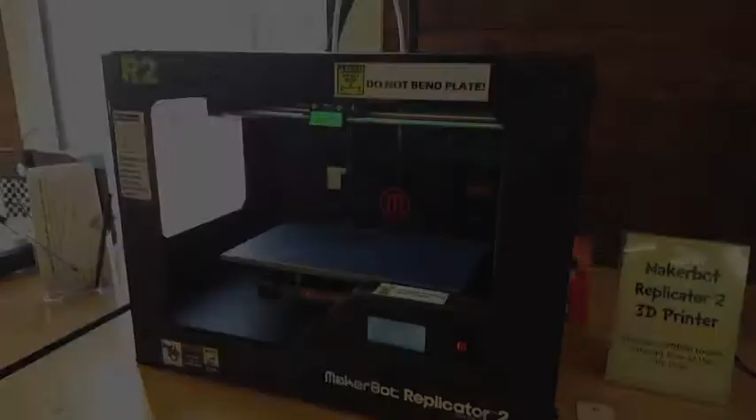This training video will cover the MakerBot Replicator 2 3D printer, and upon completion of the video, you'll want to take our online quiz so that you can become certified.

The 3D printer here runs off of PLA plastic, and it comes in the form of a spool that's just found on the back. This spool only has about a quarter of the way left, a little less actually. So there's not much left, but a normal roll will have 1,000 grams or 1 kilogram of material.

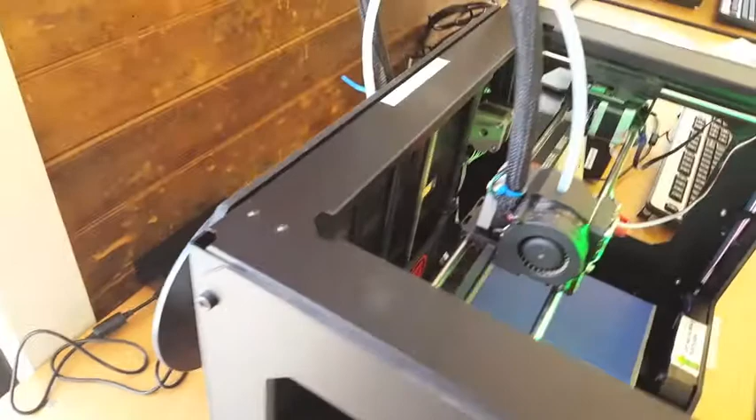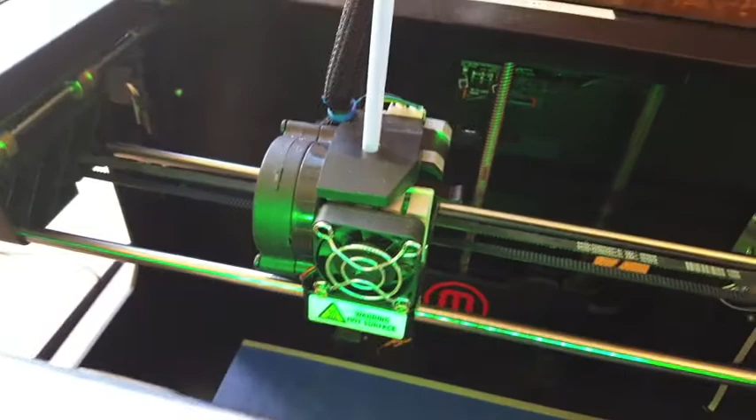As we move up here, there's going to be a guide tube, that clear guide tube there, which helps to guide the PLA plastic into what's called the extruder. And the extruder is pretty much just a hot glue gun on tracks, really, on an X and Y axis track. The plastic is going to come down into that extruder, and it's going to be fed in through a stepper motor and then heated so that it can come out that nozzle right there. Now this is an important part.

Don't touch this nozzle. It's around 230 degrees Celsius and it's about 450-460 degrees Fahrenheit. So it's very, very hot, so do not touch that surface.

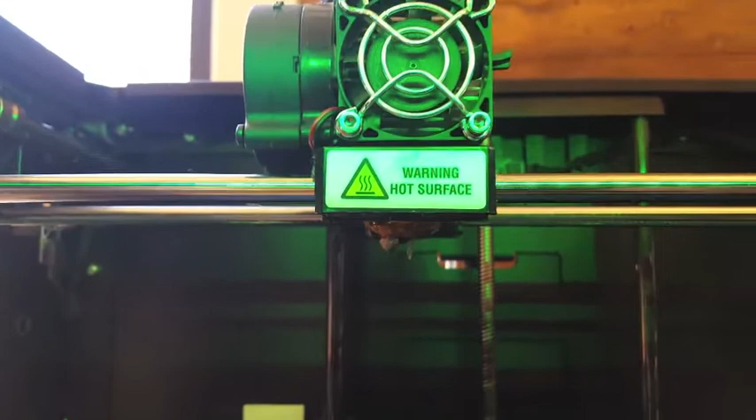Now where does the plastic go? Well, the plastic's going to go onto what's called a build plate. This is the build plate here. And here in the Fab Lab we have a couple different types of build plates. This one here is a metal machined build plate, and we do have some that are acrylic.

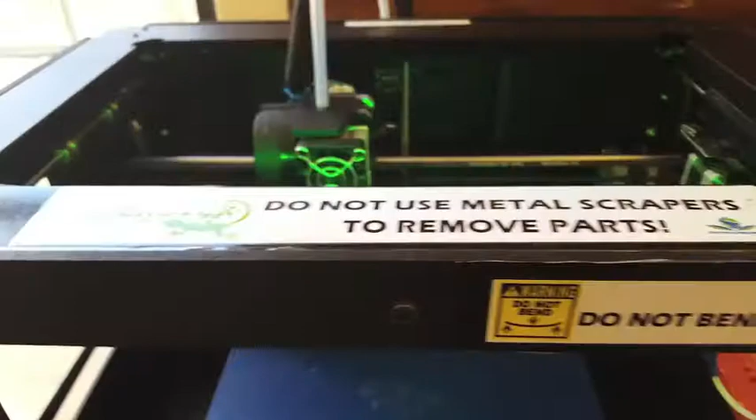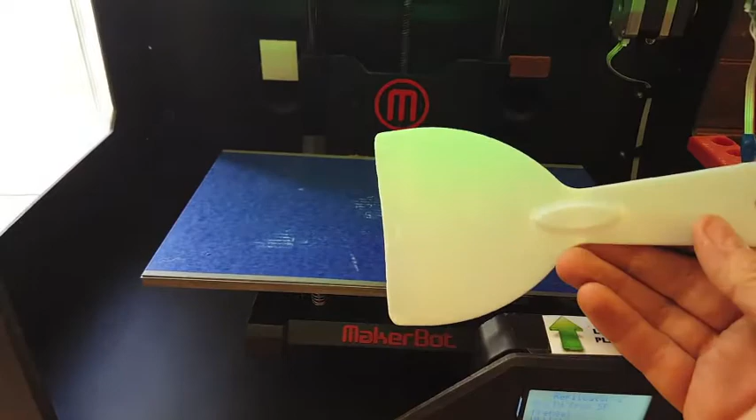One thing to note when you're using this build plate here, you'll want to make sure that you don't use any metal scrapers on removing the parts from these machines, and they have the markings listed on the machines. Instead, you'll want to either use a plastic scraper, or you'll actually just be able to twist the plate and it'll release your print. And I'll show you that in a little bit.

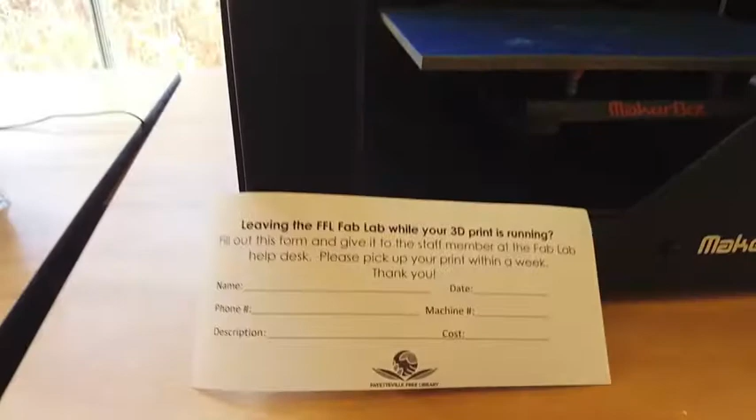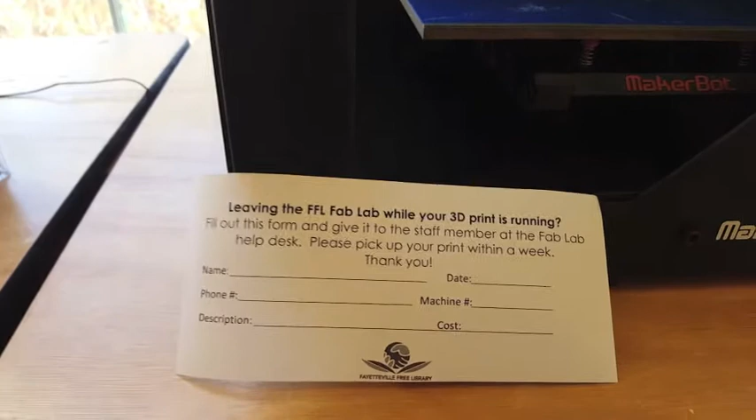One of the other things you'll note is that the machine has a letter and number corresponding to it, and this is to help with identifying parts that are printed from the machine and then tagged. Now tagging is actually a form that you'll fill out if you are leaving the Fab Lab while your 3D print is running. So you don't have to stick around for the entire print, but we do ask that you stick around for at least the first 5 to 10 minutes to watch that first layer go down on your print. And we'll talk about that a little bit more.

But on this form, you'll just fill out a name, phone number, description, the date, and the machine number. So in this case, we would be using R2, and we would place that just right there next to the machine number. Don't worry about the cost. We'll factor that out after. Now, cost does work out to be 5 cents per gram of plastic, and we measure that after the print has been completed, including any support or raft material. We'll talk about the rafts and supports in a little bit.

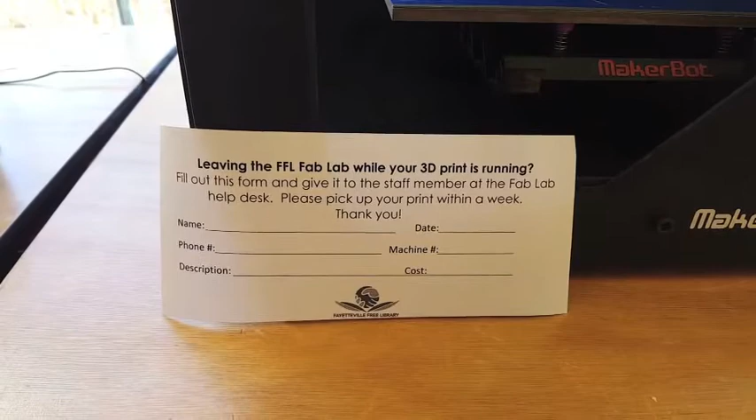So once you've filled out that form, you'll want to pass it along to one of the staff members at the Fab Lab, at the help desk, usually just behind you here. Now this form can be found usually next to one of the Replicator machines, and you'll see them across our Fab Lab. In the Fab Lab we do have 7 of these machines, and there's usually a 3D printer form with every cluster of them.

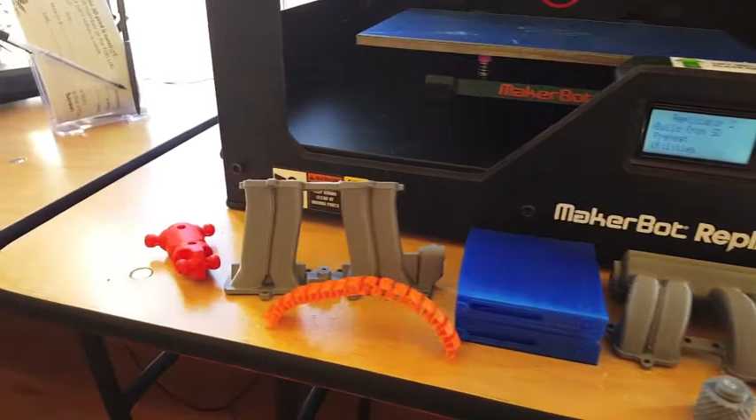So let's just take a look at some of the possibilities that this printer can perform. Now when you're looking at these parts, one thing to take note of is that everything is being built in layers. So we take a look at this, it's called a manifold. We take a look at this file here, and it printed in that orientation like this. And as you can see, there are these layers, these gaps, and this has actually been done on one of the lowest settings that this printer will do.

Lowest setting meaning resolution. So the clarity or the grain on this is fairly coarse, and you can achieve much better, finer prints, and we'll show you how when you're in the MakerBot software. But it's going to be starting from the bottom, and that nozzle is going to be moving side to side, and it's just going to be laying down plastic at the bottom layer. And every layer that it finishes, the build plate will move down and eventually create your 3D file.

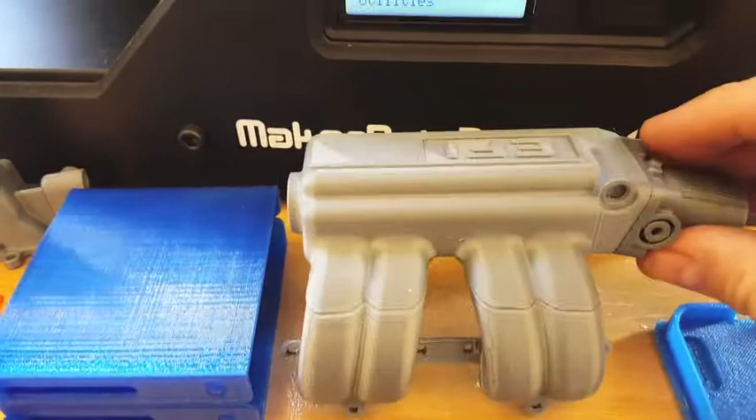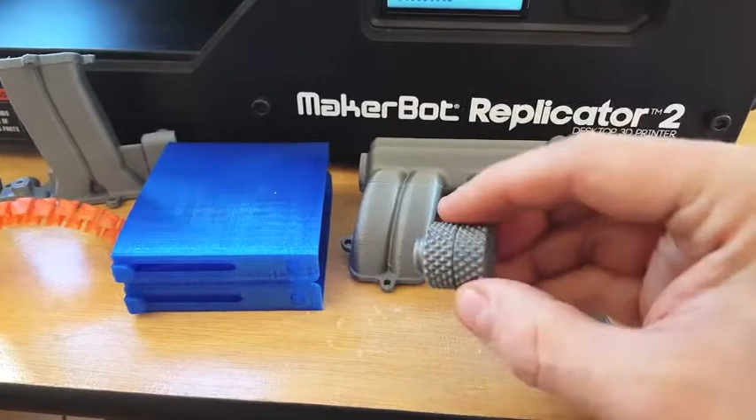So some files are static, they don't move. Some can be flexible, like this. Some actually have ball joints so they can articulate. Some will actually have hinges printed. So this was actually printing just like that. You can of course assemble pieces, whether through glue or nut and bolt. Pieces will also work with each other, like this nut and bolt. Actually, they'll thread onto each other.

And then sometimes parts will actually come with a raft material. So the raft material is like this disc of plastic that's kind of supporting or holding on to this iPhone case. And this disc of plastic, this raft, is disposable, but it helps to keep parts flat. So it's going to help prevent warping. And warping is usually a problem. We prefer that a raft is used.

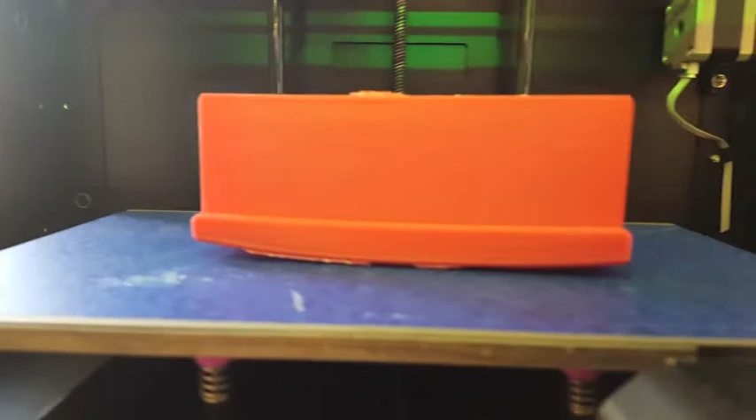And this model here is a pretty old model. This one here, we could see quite a bit of warping. And this warping was due to the fact that a raft was not used, and this wouldn't be desirable for your print. However, this is a successful print; it didn't fail. But a lot of times, when you get that type of warping, you're actually going to see the print fail.

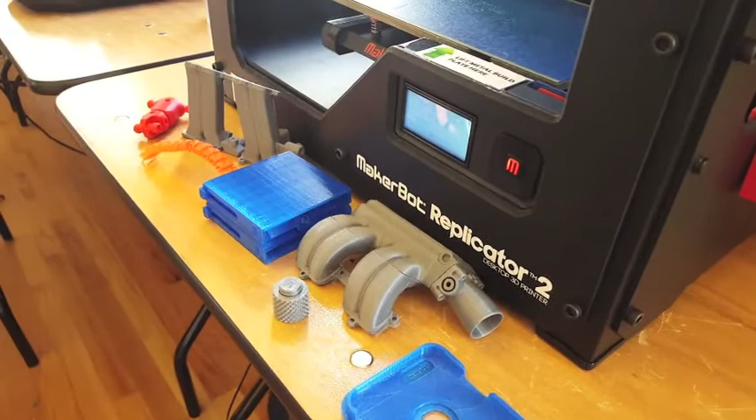So let's talk about how to actually obtain a file for 3D printing. There are two different file types that we'll want to obtain for printing. You can look for either an STL, that's .stl file format, and it's stereolithography, and that one is probably our preferred file format. You can actually find .obj files as well, and those will work with the software. These file types can either be created, downloaded, or scanned.

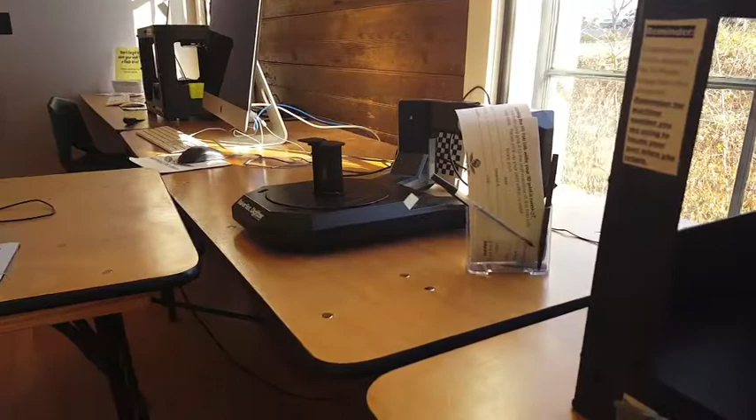When we look at the computer here, we'll see that our desktop is arranged in these 5 different areas. And we really want to take a look at the 3D design apps, 3D printer app, and the help utilities. Now, if you want to scan something, we do have what's called a MakerBot Digitizer. That is available. And that software will be found under this link here. And it's pretty self-explanatory. However, there are some better alternatives for 3D scanning. Another alternative is an app called 123D Catch, which you can use through the web, through Apple devices, or through Android.

In these 3D design apps, we have Tinkercad, FreeCAD, SketchUp, Blender, and an industry standard one, SolidWorks, which is a lot like AutoCAD. So this is more of a professional level, but Tinkercad would probably be the base one, the one that you would want to start off with. It's a browser-based program; you don't have to download anything. You just go to tinkercad.com, you log in, and you can create there, and your files are saved. Come here to the Fab Lab, log in, and your Tinkercad account will have all the files that you've made. You could just download and print from here.

So the other way to obtain one of these STL files is to download them. And one resource that most patrons use is a website called Thingiverse. You want to check that out. Thingiverse is a collection of STL and OBJ files for 3D printing that have been uploaded and created by users from all over. So anybody can upload files, and that means it may be an engineer, a hobbyist, or a young child that has very little experience in 3D design. So your file may or may not work.

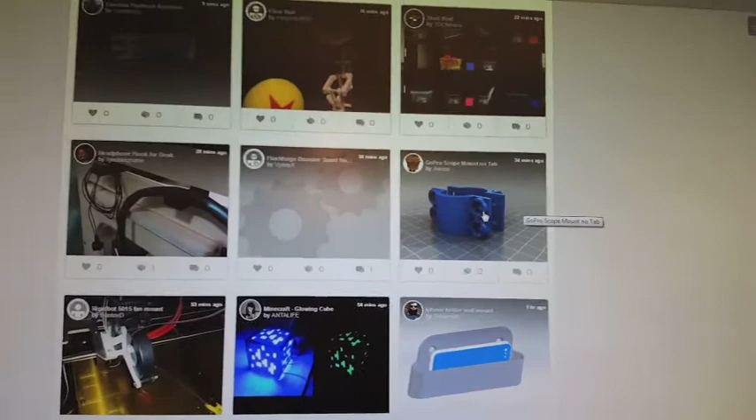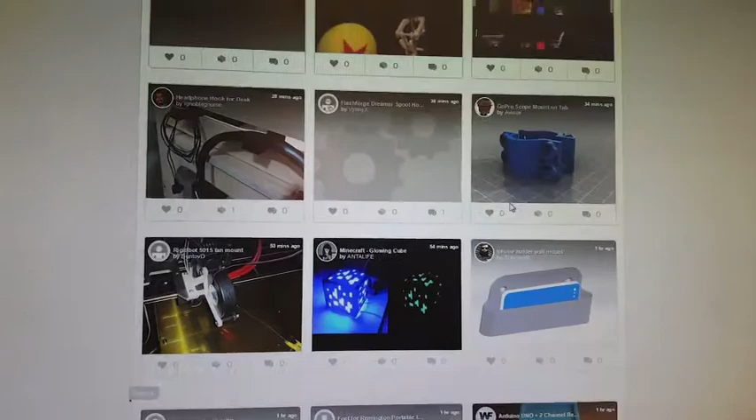Let's just take a look here and click on the Explore button. Click on Things. When we're looking at files here, just be aware of files that are in this computer graphic kind of representation. It's not that they can't be printed, but you'll really want to look for files that have true pictures uploaded to them. These are all kind of like Facebook pages. And looking at one like this, it just means that the user has not uploaded a picture of that object being printed. So it may or may not work.

Once you go onto a file here, you can take a look at it, click Download This Thing, and you'll have your STL. When you usually download files from Thingiverse, they're going to go into the Downloads folder. What you can do is just open up MakerBot Desktop.

And here we'll see a screen of a visual representation of our build platform, the limits of our machine, which are about 6 inches high, about 11 inches wide, and about 6 inches front and back. So it's a fairly big area. There's the front of the machine with this little pointer.

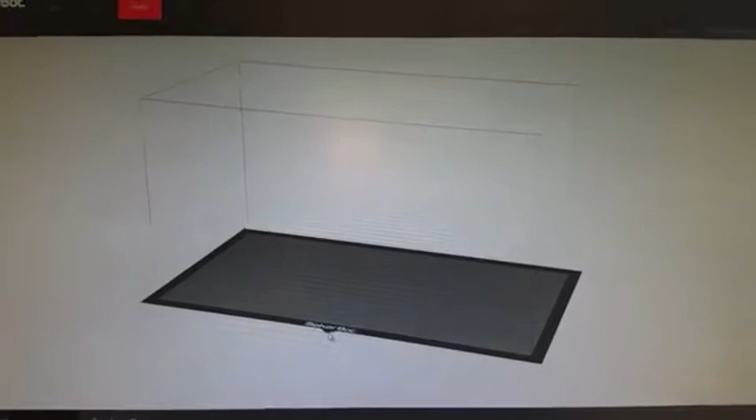Let's add our file that we had either downloaded, created, or scanned. And to do that, we're going to take a look along this grayish bar where it says Untitled, and we'll follow that along. You can see here that it says Settings, Add File, Preview, Export, and Print. Let's click on Add File.

So this is where you would want to navigate to the Downloads folder. And this is most likely where that file will be that you've downloaded from Thingiverse. We're going to pick one that's on the web or on our desktop here for our practice. Here's our file.

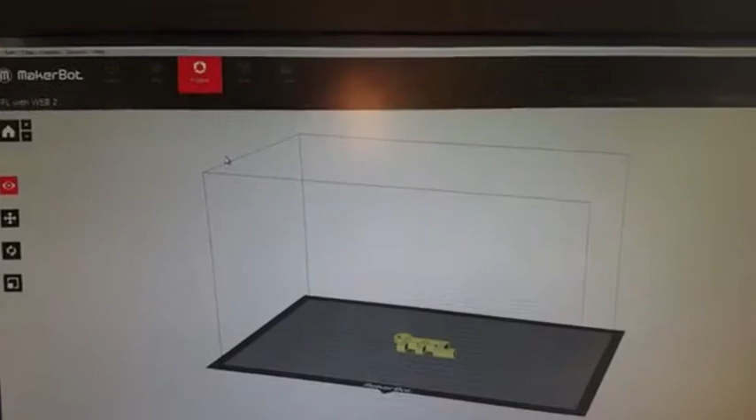And now using the mouse, think of it with 3 different tools. You have your right mouse button, your scroll wheel, and then your left mouse button. Now your right mouse button is always going to be the rotate tool. So you press it down, hold it, and move your mouse, and you'll start to move around in 3D. Now the scroll wheel, if we scroll in or out, will allow us to zoom in and out.

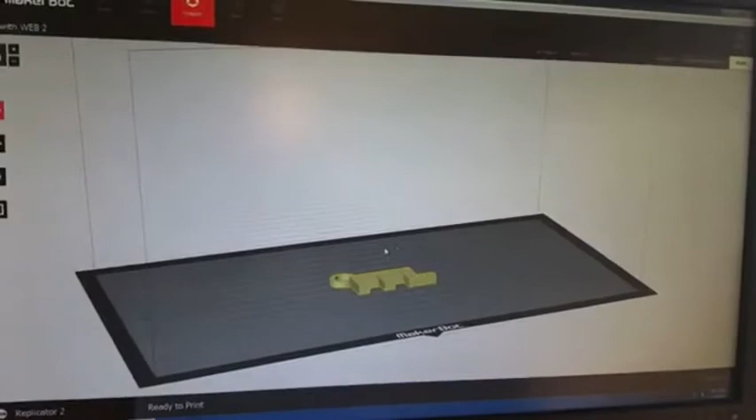And if we press the scroll wheel down as if it was a button, and press and hold that, and now move the mouse, we actually do what's called panning. So we're actually moving the entire platform around. So that helps so that we can zoom in at a lower portion or another portion of our file.

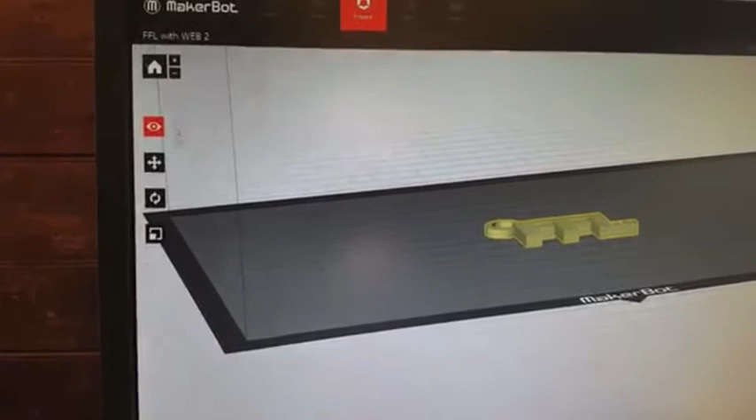Now the left mouse button, that's going to be whatever is highlighted here along this left hand side. So you could always remember the left button always does what's highlighted here on the left side of the software. We have change view, move, rotate, and scale.

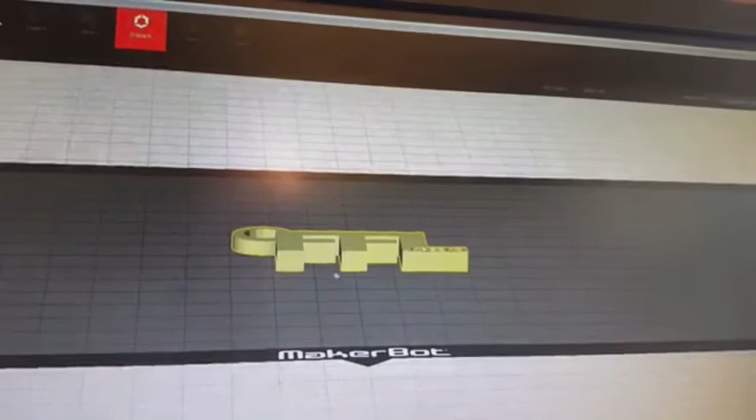Now this file here has come in, and this is great. This is perfect for 3D printing. It's flat, doesn't have any overhanging features. Okay. So this could print just like this. But not every file is going to look like this when it comes in. So what might it look like? Well, it could look like this.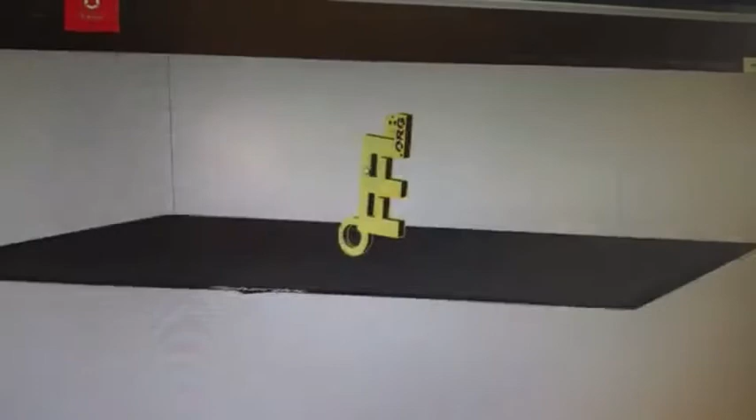Now we could theoretically print with what's called support columns, but that wouldn't be the way that we want to print this. So this would require kind of flipping and turning and using some of these tools over here. So let's try and take this file that I've kind of twisted here and bring it back to a flat orientation.

So let's try and use the move tool. If I click once, I could go and move the object on the platform, which is great, but it doesn't really help me with laying this flat. Now one neat thing that's kind of hidden is over on each tool. If you click on it one more time after it's been turned red, you're going to see a little flyout menu. We got a couple different variabilities here that we could type in: the X position, Y position, Z position.

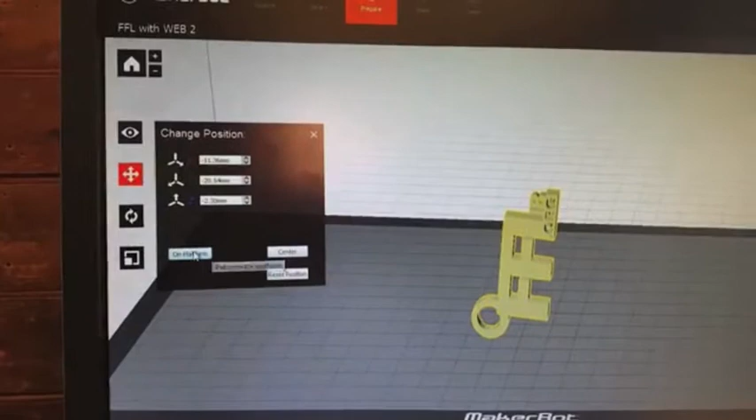We want it to be on platform, and we want it to be centered, usually. Okay, but it's still not helping us with changing that layout. We need to lay this flat. So let's take a look at the turn or rotate tool. We click on this. If I click on it once, I could click and drag on my part, but it's just going to spin it around on the platform.

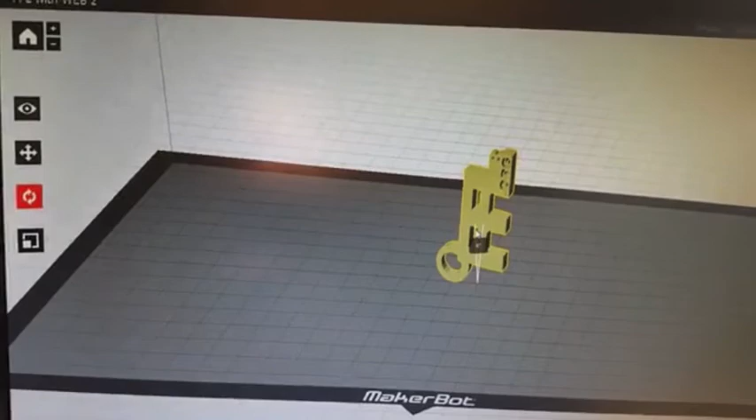And again, it's not turning it in the right manner that we need. So let's see if we could use this tool again. Let's click again to get the flyout options here. And now let's see if we could lay flat. Well, lay flat didn't work.

We need to rotate it so that the computer can figure out a little more clearly what is the bottom and what's the top. And we can see that we're rotating in all different directions here. So let's try and maneuver this around so that we can get this to lay flat. Now, unfortunately, that button, lay flat, doesn't really work in the way that we would think usually.

So here we have it, and it's still kind of tipped a little bit. Let's see if we can continue to rotate it here. There we go. So now we've made this flat once again.

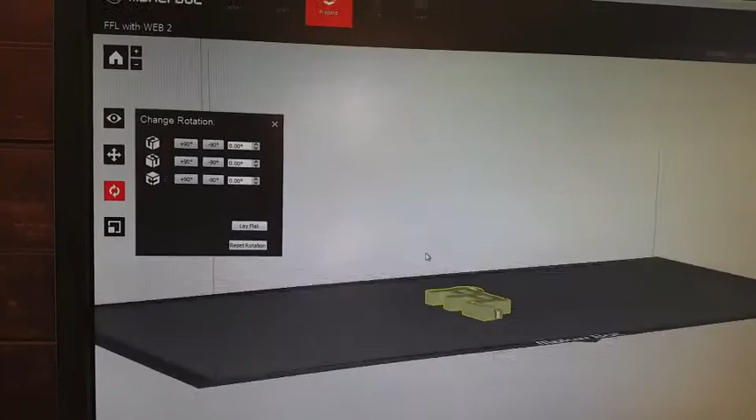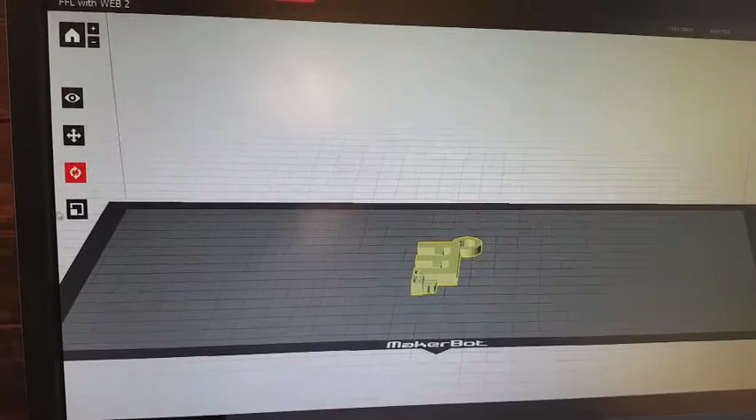Okay, so now that we have this flat again, what we want to do is let's check out that scale tool over here. If we click it once, it turns red, and now if I use that left mouse button, click and hold, I could change the scale on it so it's as if it's zooming in, and change the size of that print.

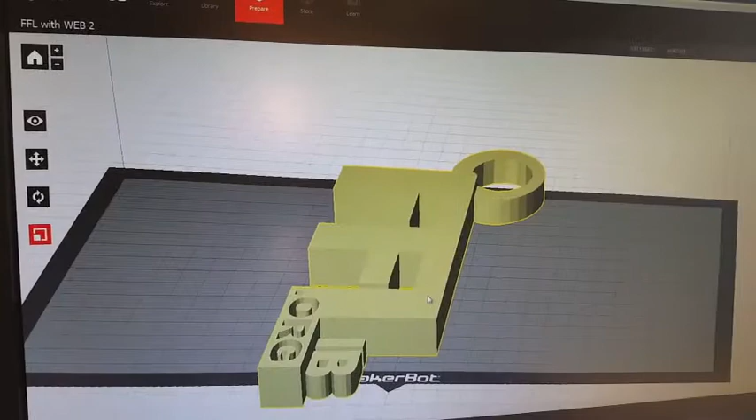Remember though, you want to stay within the confines of that gray platform. So right now we're too large for that platform. What we could do though, we could rotate it on the build platform here so that it would fit.

And you can also use a shortcut, which is Control and L. So when we do Control L, it'll help the layout. A lot of times it'll center the item and twist it for you. So Control L helps to do that auto layout.

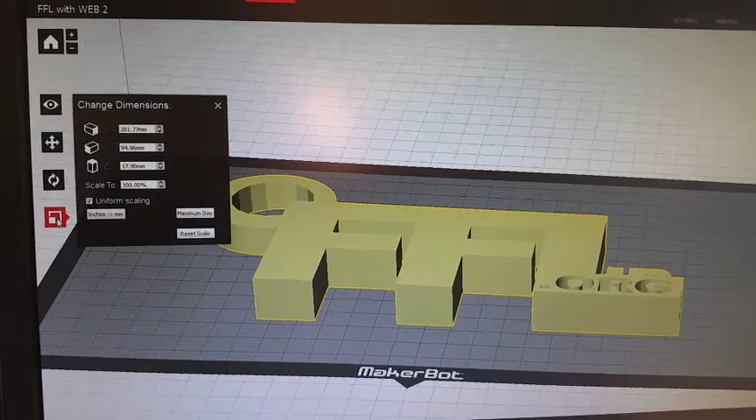Let's go back to scale and use it with that flyout menu. So if it's not there, click again after it turns red. Now we can change the dimensions of it in the X, Y, and Z axes. And we can also change the scale as a factor of 100. So if we wanted to half the size of this, we could type in 50 and it'll take 50%.

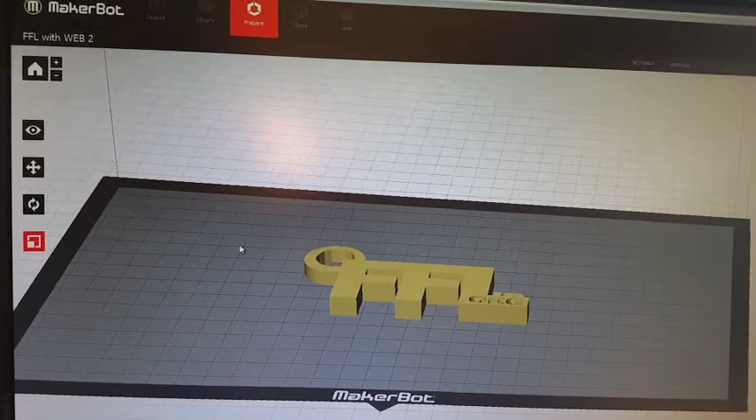Sometimes when you have your object here and it's not selected, when you go and click a tool and you use that flyout menu, you'll notice that it says that there's no object selected. Whenever that happens, just go ahead and click on the object.

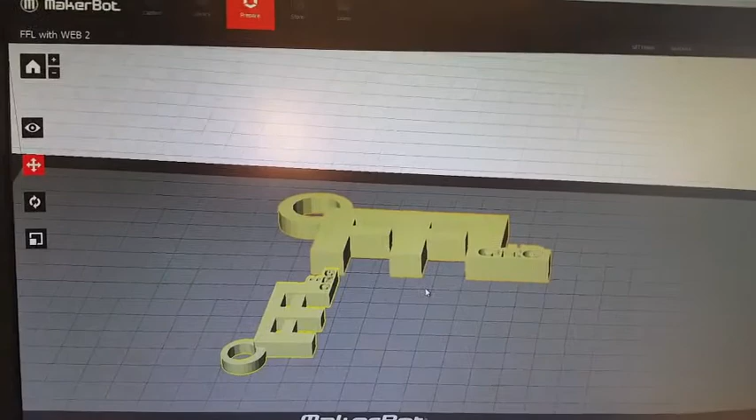Now let's say we wanted to add more than one thing to this plate, and we can. All we'd have to do is go to Add File, and we could bring in a whole other file. It doesn't have to be the same one. Now when that comes in, you could see they're on top of each other, and being on top of each other would mean that they become one as it's printed. So again, use that Control L button, and it'll do a proper layout for you that it finds best.

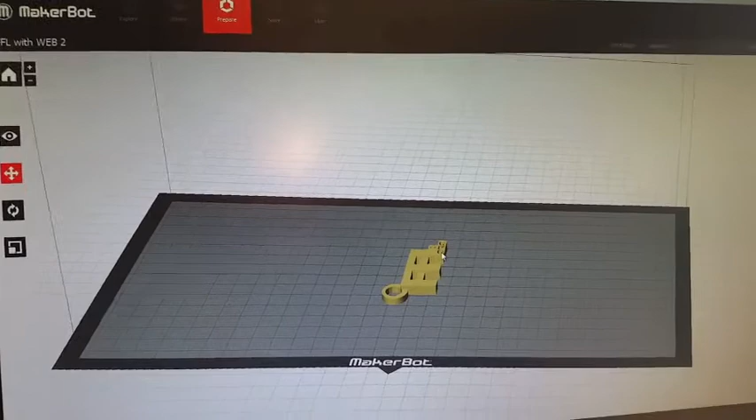This looks good. What we can also do is just select something, hit the delete key, and it will remove it. Let's do Control L again. Centers it. All right, this looks like it's ready to print. So will you always have to use these tools? Not always. Sometimes the files come in just right, and this one did originally, but we had twisted it just to show some of those tools.

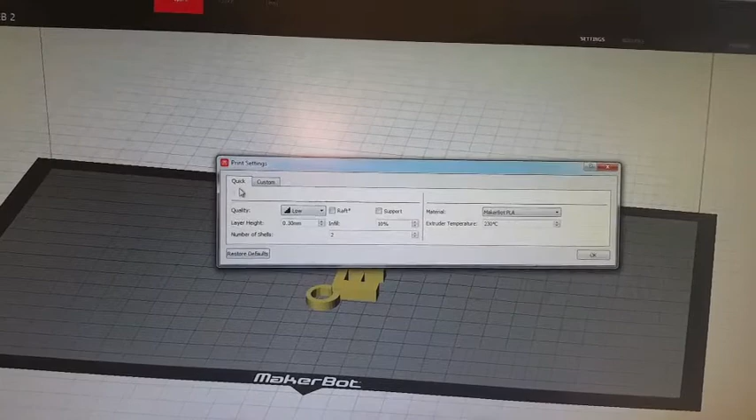So now what's next? You always want to click on Settings. So after hitting that Settings tab, you'll want to go ahead and hit Quick. Quick is the one that we'll use, and we can find quality settings, raft, supports. Let's start off with the best kind of practice.

As soon as you open this up, go to Quality and click Standard. Then go and click Restore Defaults. That's going to set everything to its standard defaults, just in case somebody had messed with it prior to you coming and sitting down at the Fab Lab.

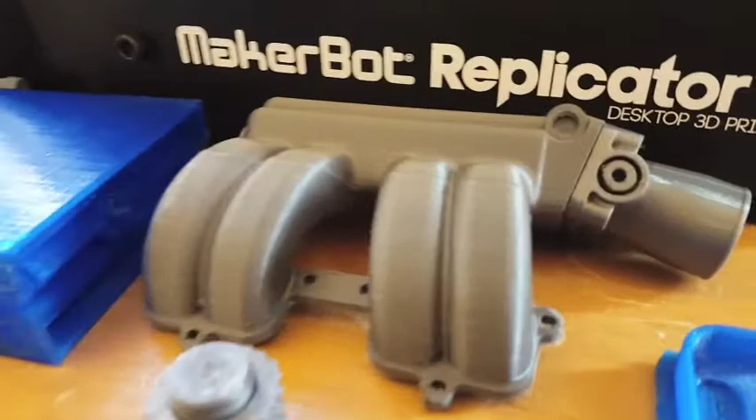Now quality, what does that mean? That's referring to those resolution layers, those layers that we saw in the parts. So standard is going to be a little cleaner than that part, and a little cleaner than that part there.

We don't really recommend the high level of resolution, so just stick with standard. If you need something printed quick, go ahead and click low. Raft. Well, that raft that I had showed you earlier on this part here, that's just a disposable piece of material that just helps with preventing warping. So we just want to make sure that that's check marked, and it already is check marked. It's recommended. It's the default setting.

Anytime you switch off of a default setting, you'll find a little asterisk will pop up next to the value that's been changed. So that's a way to kind of warn you that something has been changed.

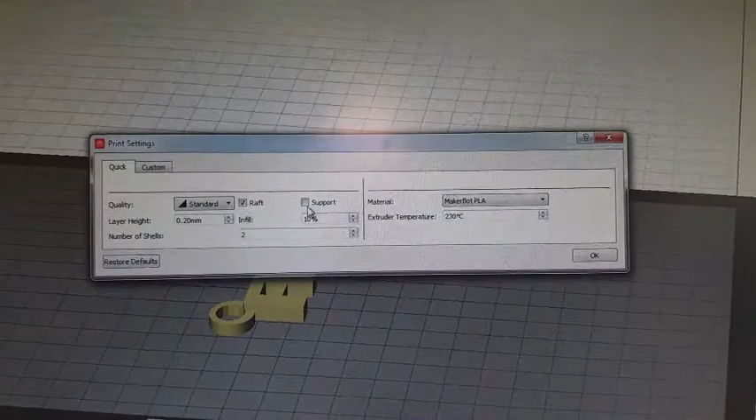Support material. We don't need support material on this, but supports are columns that the printer makes of plastic, the same type of plastic, that will help to prevent any kind of drooping of things that are unsupported. So if this keychain was sitting in the original orientation where it was kind of standing up on its end, we would definitely need supports. They're like bridge supports, but we don't need them in this case.

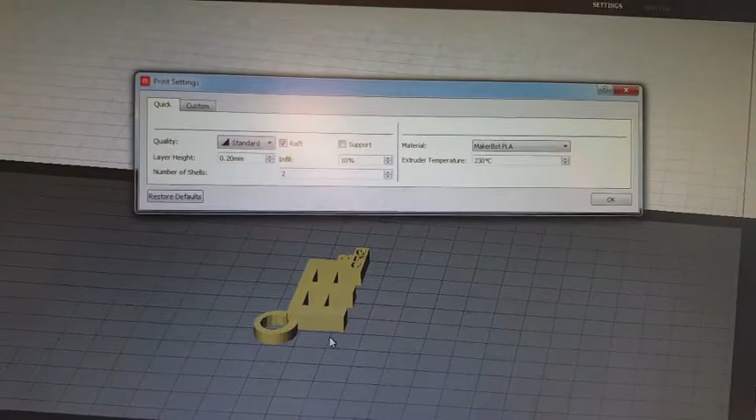Infill. That's set at 10%, and what that's referring to is a honeycomb structure that's actually inside all of these parts. We'll leave that at 10%. And then number of shells, that makes up the outside layers, the layers that you're actually touching. So there's 2 walls thick of solid material, and then it's going to be filled with 10% honeycomb. We're going to click OK.

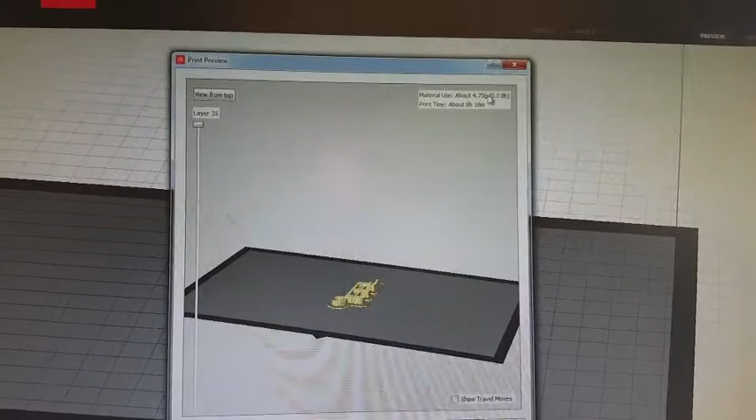And now let's go up to the Preview tab. So the Print Preview gives you this nice little material use and print time report. We can see that it's about 4.7 grams of material. Remember, it's 5 cents per gram, and we'll round to the nearest whole number. Print time is going to be about 18 minutes for this part, and if we take a look at it, sure enough, we do have that raft material there now.

We can also see the layers that it's going to build in. It's tough to see on the resolution of both of these screens here, but there we go. We can see some of those layers there. A cool little tool here. We can actually pull down and go through the layers, and we could look at that honeycomb that I was just talking about. We zoom in here. So there's the honeycomb structure. Those are the walls inside to help keep this rigid. Not too many, but it keeps it nice and light and structurally fairly rigid.

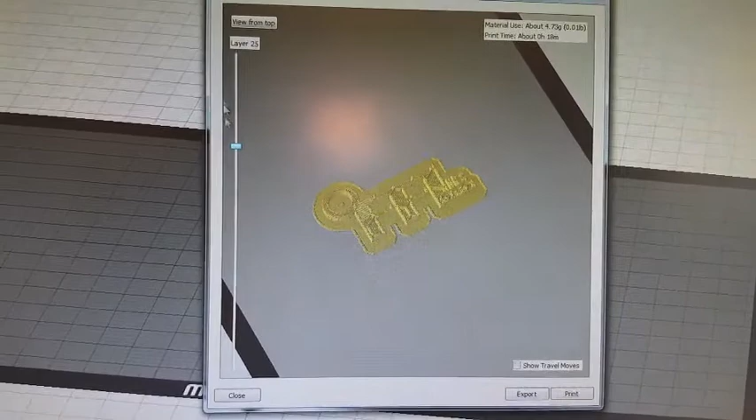Let's click on Print. What that's going to do now is move and send that file over to the printer. It's going to start to home the machine here, raise the bed. Now we put blue painter's tape on this printer bed. They don't need it, but it is preferred. We can help to apply that if you feel that the blue painter's tape is used up or torn.

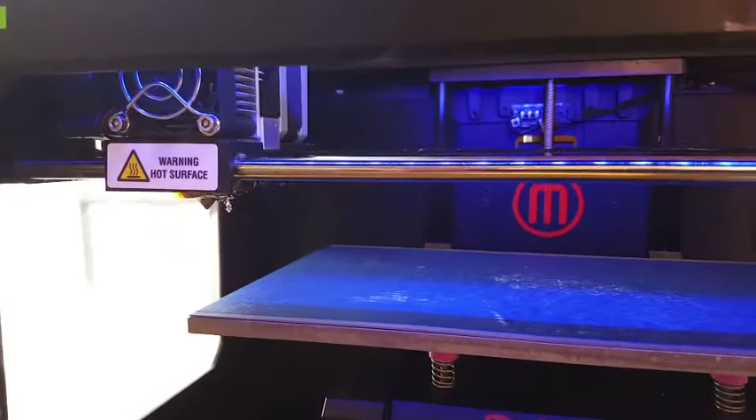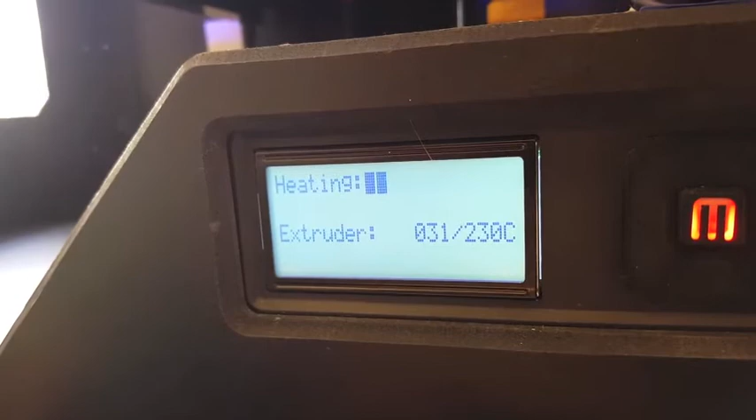That nozzle is going to sit right there. You'll notice that the LEDs change to a blue tint. It's telling us that it is currently heating up. It needs to get to 230 degrees Celsius, and it's right around 31 degrees Celsius right now. If you have not seen this kind of action happening at the printer, it usually means that we aren't connected via the USB cord. So you want to check the front of your machine just to see if you have the USB cord plugged in to the printer.

So we're going to wait here while this heats up. It'll take a couple minutes. We're at 100 degrees already. Okay, we're just about there. There we go. So why do you want to stick around? You want to make sure that the printer starts laying down plastic before you leave. So by making sure that it's laying down plastic, and usually waiting until this first layer or this raft is completed, then we're pretty sure that it's going to stay working while you're gone.

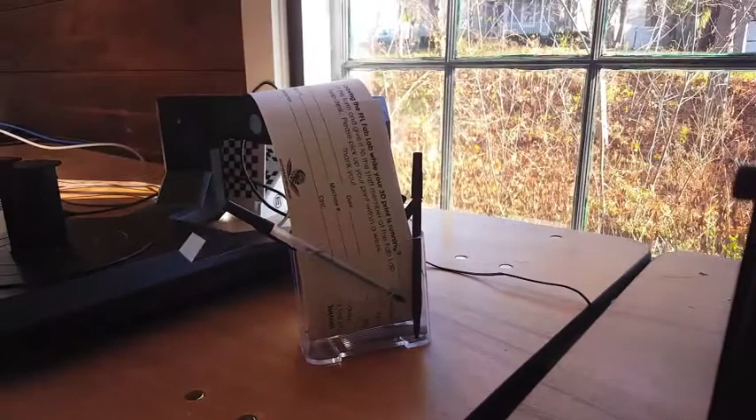So in the meantime, as you're waiting here, fill out one of those forms and keep an eye on that print. So there's the raft coming down. Let me see if I can find a better angle. And that raft is just the bottom layer, that disposable raft that will eventually peel off once it's all done, but it helps to anchor that to the build platform.

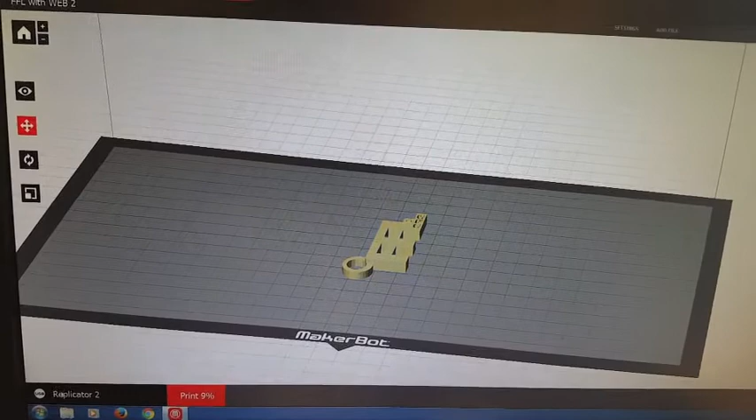Taking a look at the computer again, we'll see that there's a Replicator 2 taskbar down here, and it says print 9%. In the bottom right hand corner, if I go and click on monitor, I get a little panel that pops up. We can see the elapsed time is 3 minutes. It's about 10% done. This will eventually calculate out estimated time and filament usage, but that's another way to show the progress.

Now, if something was happening, let's say plastic was not coming out of the printer, or the plastic was not sticking to the plate and it was following the nozzle, you want to open up that monitor and click cancel. Cancel will stop this from printing, but we can see here it's printing nice, so we're good.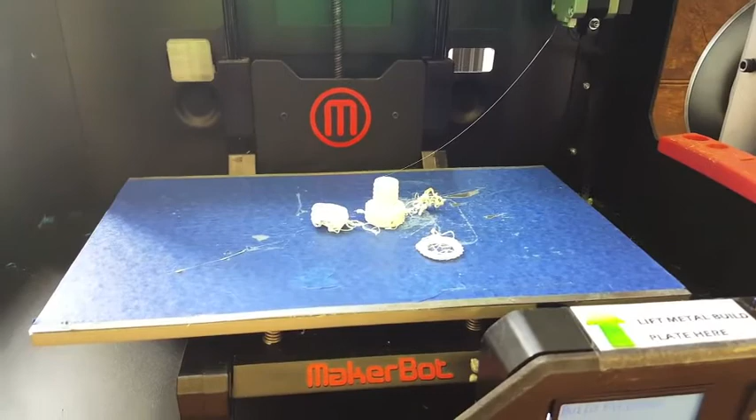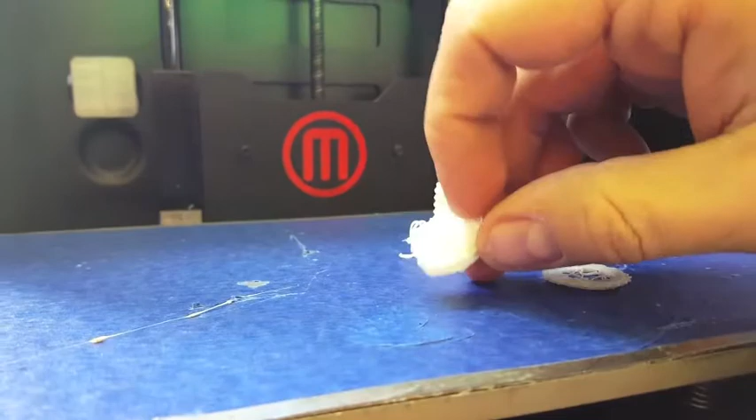So what can happen when prints don't stick to the platform? Here's an example of a print where half of it was stuck to the platform and the other half really wasn't, but it's still kind of completed. This is why we tell you to wait around for that first layer to go down, the first couple minutes, because we would have seen that this had broken free from the build platform. Now this one here is on there nice and strong, but the other part of this nut and bolt clearly hasn't printed well.

Okay, so we're just about done. It's 99%. There we go. So once it's done, it's going to lower the build platform. It's going to put the nozzle, the hot end, back in the back corner. Again, be careful because it's hot, so don't touch the nozzle. Alright, so here's our print.

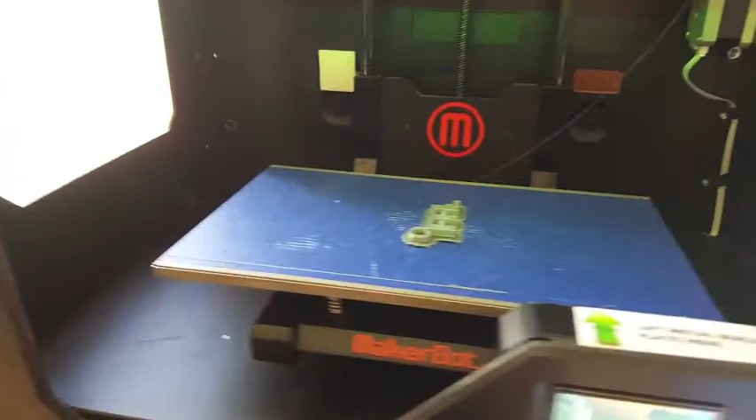Now, with this build platform, what you'll want to do is lift the metal build platform right here. You'll see that there's a little relief right back there. You want to lift that up here, and it just is magnetized. You take that off. Alright, so now we could go and see if our part will come off. We can use either the plastic scraper, or you can actually twist the platform. So let's do that.

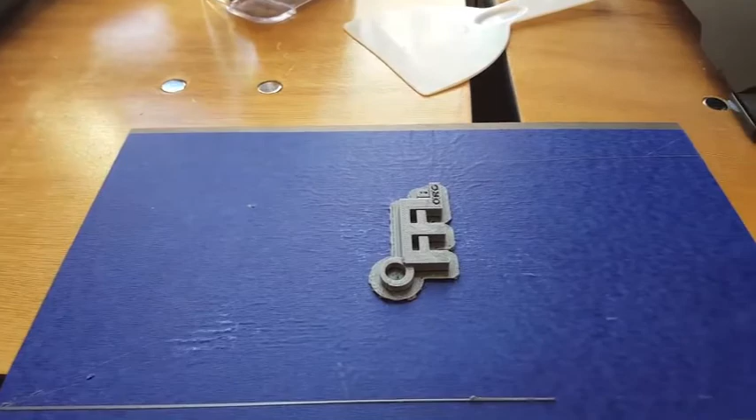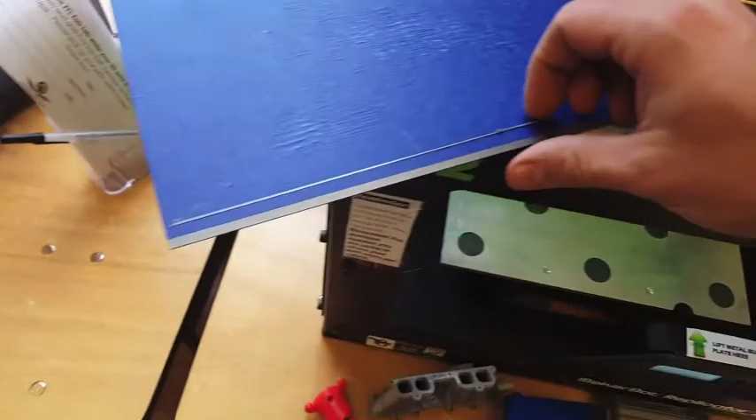Okay, so we're going to take that platform, there it is, give it a little twist, back and forth, just kind of twist it, see if we can get this off now. Still in there a little bit, use that plastic scraper, there you go, now your part's coming off. Now that your part is off, just make sure that we take this little test line, make sure that that's gone.

Take that metal platform, and in this case we just want to lay this down. It's going to be magnetized, so it's just going to snap down. Make sure it's kind of square on there. You can slide it on there. That's good.

On other machines, the build platform's an acrylic platform, and it's this one here. It's clear and it's got blue painter's tape again on top. But one thing is that when you want to remove parts, you can use a metal scraper. Just be careful. If you need assistance, always ask one of the Fab Lab staff members.

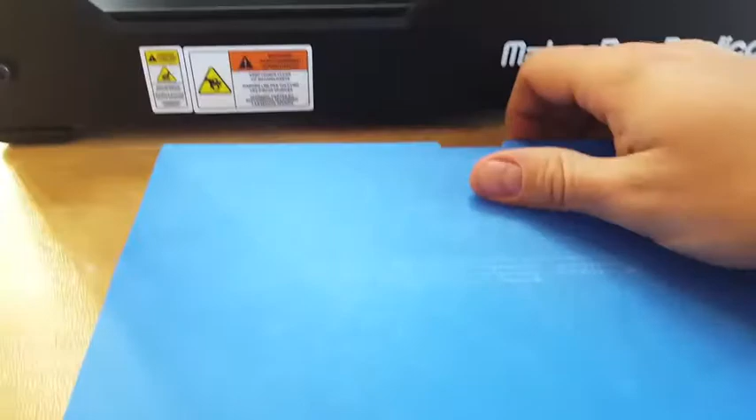To remove the platform, though, there is a little tab back here that's holding on to the platform, and then two in the front. Now, these two in the front don't move, but the one in the back does. So a lot of times I'll take 3 or 4 fingers, put it underneath the platform, provide a little bit of up pressure on it, and I take my thumb and I just push that tab back, and the plate will pop off, and now we can use a scraper to take off whatever part was printed.

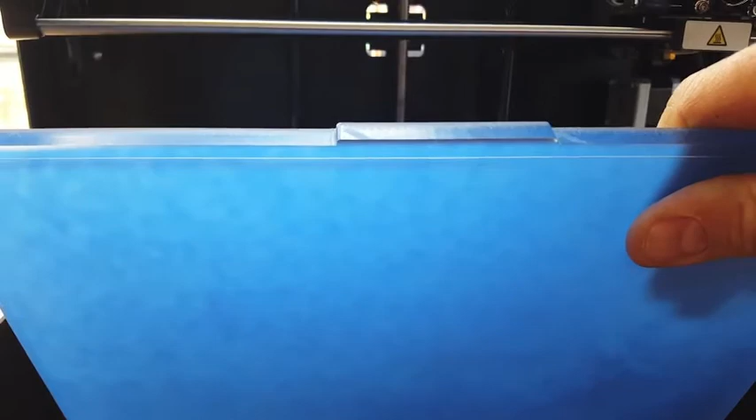To reapply this platform, there's one notch in the back, and there's more of a tab on the front of the platform. Take the notched portion, put it to the back of the machine, so that it goes right into that tab there, and then on the front, just push down, and it'll snap in.

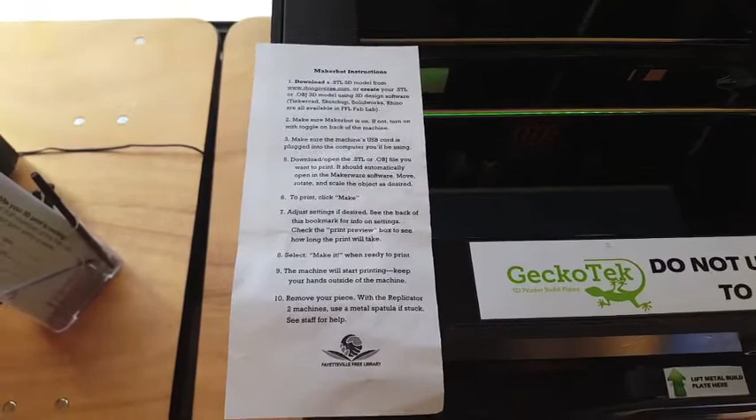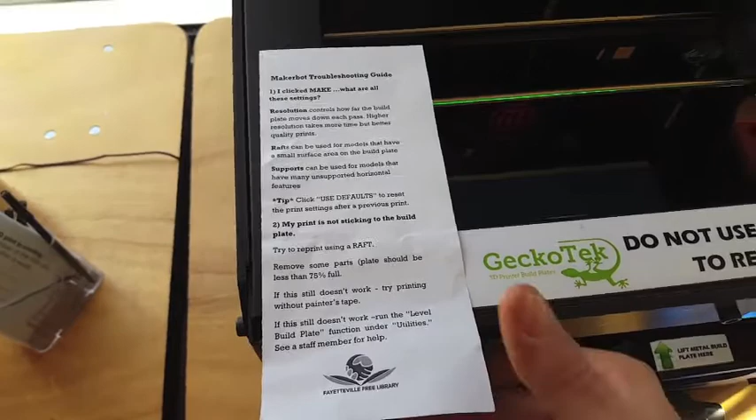If at any point throughout the process you do have questions, you can always refer to our MakerBot instruction guide, and that's a bookmark that's available in the Fab Lab. When you first walk in, you'll see a large display with a bunch of different bookmarks. This is the MakerBot instructions, it walks through all the steps for you. We also have some troubleshooting tips on the back, and of course you can always ask a Fab Lab attendant.

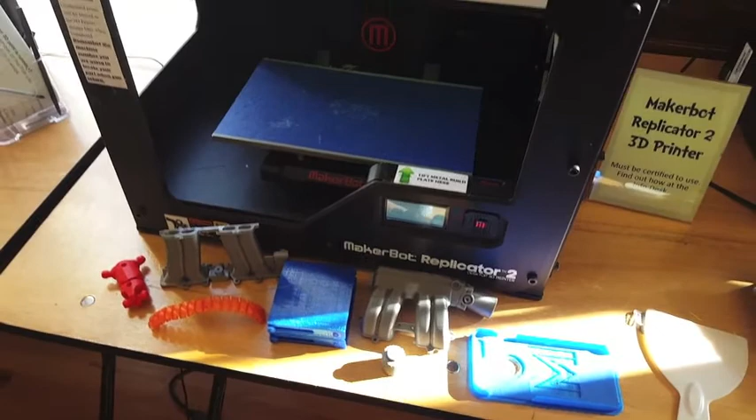This now concludes the 3D printer certification. What you'll want to do now is click on the link and take the 3D printer quiz, and you are now certified.